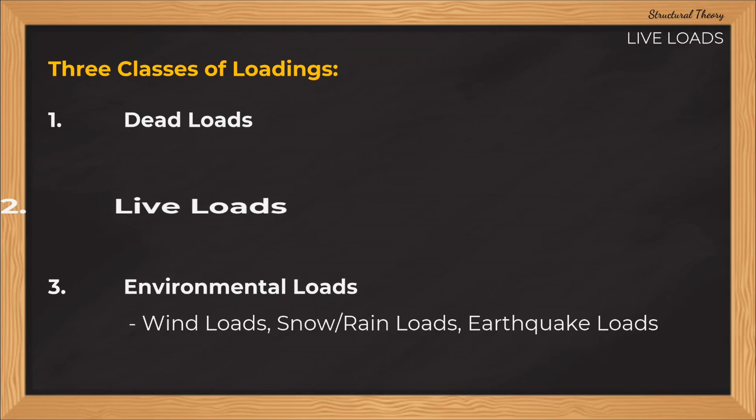So let us first define what live loads are. Live loads are loads of varying magnitudes and/or positions caused by the use of the structure. So these are loads with varying magnitudes. This means, unlike dead load where the magnitude or amount of load is constant, here in live load, the magnitude varies. This means the magnitude is not constant. And the position or point of application of our load is also varying, meaning it is not fixed at a specific point. So that is what we call live loads.

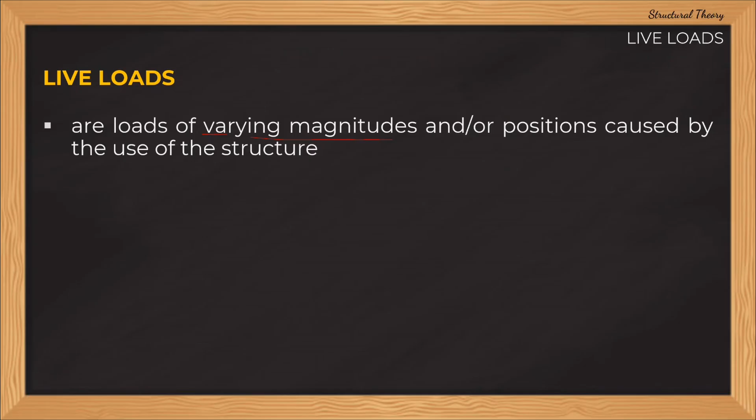They may be caused by the weight of objects temporarily placed on the structure, moving vehicles, or natural forces. So for example, in a building, our live loads here are the occupants of the building - meaning the people, the weight of the people. Their magnitude varies, meaning the weight of occupants differs from person to person, and the point of application of our live loads also varies.

Then another example we can consider as live load is the equipment we place in our building, or tables, chairs, beds, cabinets, and similar items. These are temporarily placed on the structure and can be relocated, which is why they are called live loads.

So there are two types of live loads. The first is what we call live loads for buildings, and the second is live loads for bridges. What we will discuss in structural theory is only the live loads for buildings. But if I have time, I may also discuss live loads for bridges. Of course, live loads for bridges are different because the live loads there are the vehicles passing on the bridge.

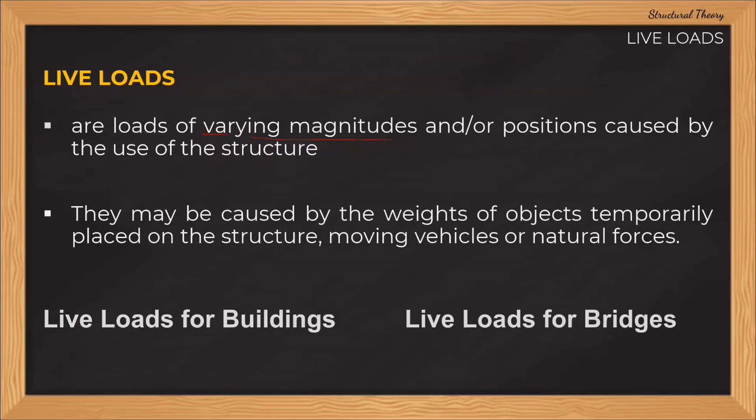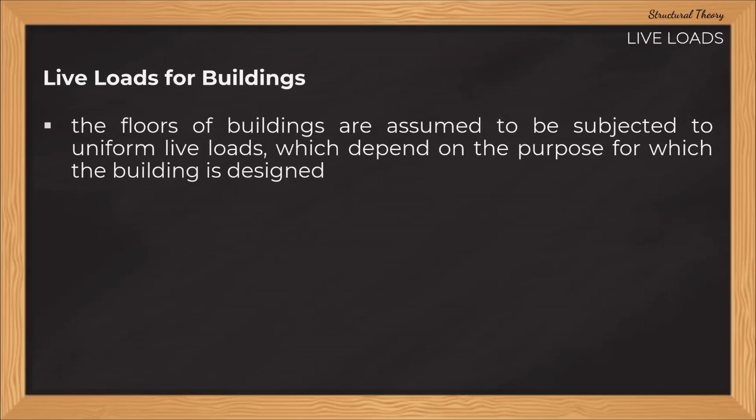So let's focus on live loads for buildings. The floors of buildings are assumed to be subjected to uniform live loads which depend on the purpose for which the building is designed. Our live loads in a building depend on the purpose of how we design the building. For example, when we design a classroom building, its live load is different from another building, say a library, or another building like an office building. The live load differs depending on the use of the building.

So our basis here is section 205 of NSCP 2015. According to section 205.1, live loads shall be the maximum loads expected by the intended use or occupancy, but in no case shall be less than the loads required by this section. So again guys, what's in NSCP 2015 are the minimum live loads used for design. If our actual live load is greater than those reflected in NSCP, we use the actual value. But if our actual value is lower, we use what's in NSCP, because these are the minimum required live loads.

Okay, so here guys, section 205.3, which is called floor live loads. According to this, floors shall be designed for the unit live loads as set forth in Table 205-1. This load shall be taken as the minimum live loads of horizontal projection to be used in the design of buildings for the occupancies listed, and loads at least equal shall be assumed for uses not listed in this section but that create or accommodate similar loadings.

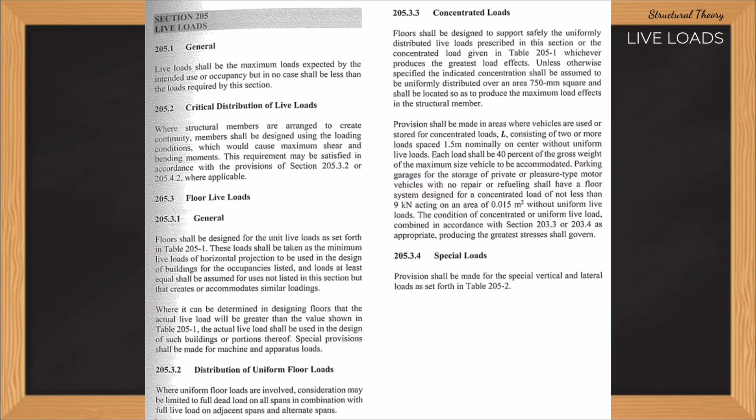So let's find Table 205-1. Here it is in this table. The title is Minimum Uniform and Concentrated Live Load. So again, our live loads depend on the category, description, or the occupancy itself of our floor.

Take note guys, as a reminder to everyone, live loads are applied to the floor or slab. Specifically to the slabs. Starting from the second floor, third floor, fourth floor, and so on.

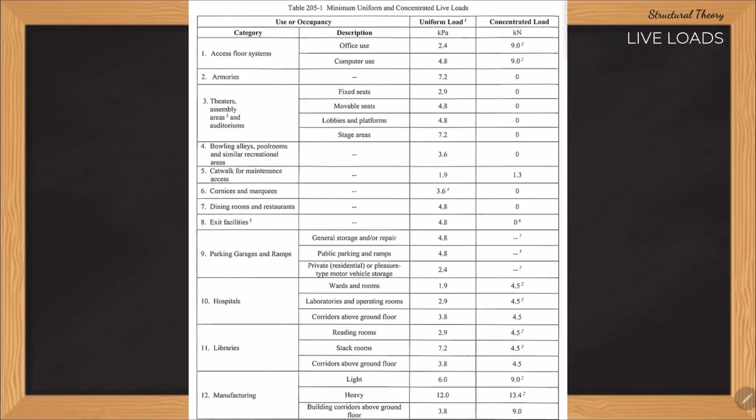So again guys, it depends on the use or occupancy. For example, we have here dining room and restaurant. The live load we'll use is the uniform load of 4.8 kilopascal. Usually what we use is the uniform load, not the concentrated load. But there's something written in the NSCP regarding the use of concentrated load, so you can read that. In this video, we'll focus on the uniform load.

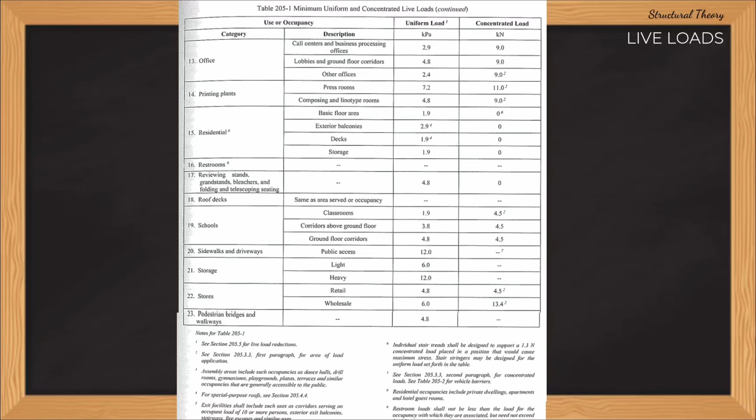So again, if the building is residential, the basic floor area is 1.9 kilopascal. Exterior balcony is 2.9 kilopascal. Decks or roof decks is 1.9 kilopascal, and storage is 1.9 kilopascal, and so on. There are many items listed up to item number 23, which we can choose from later when we solve a problem.

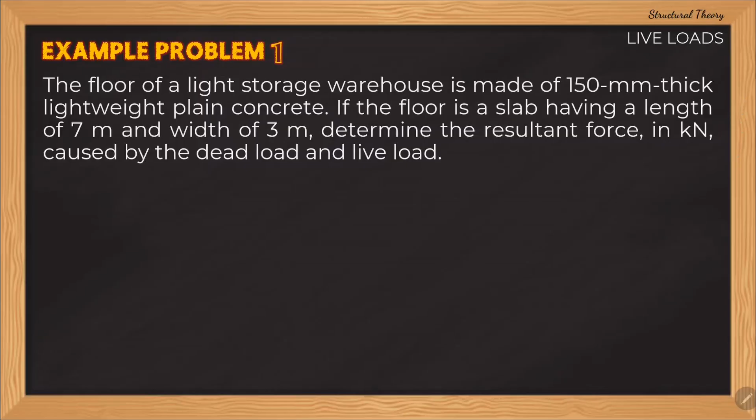So again, we have a slab with a length of 7 meters and a width of 3 meters, and a thickness of 150 mm thick lightweight plain concrete. Now, what we want to get here is the resultant force in kilonewton caused by the dead load and the live load.

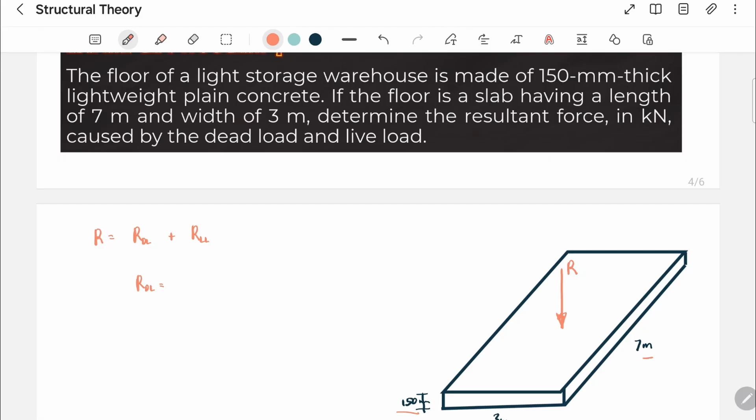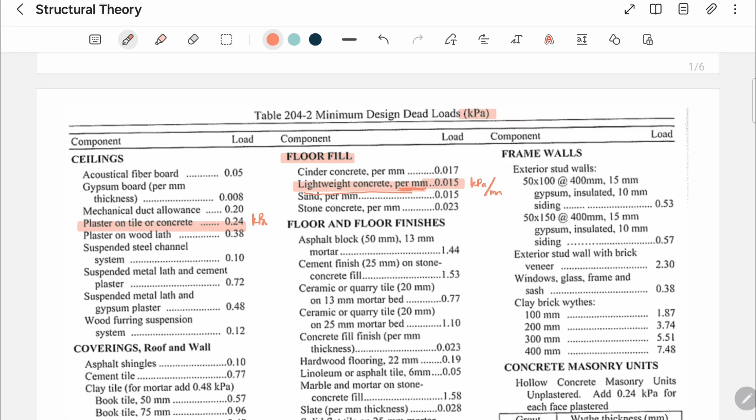So again, this is a 150 mm thick lightweight plain concrete. If we look here, we have a floor fill of lightweight plain concrete, and that is 0.015 kilopascal per millimeter. So that's what we'll use for our dead load, this is 0.015 kilopascal. When we say kilopascal, that is kilonewton per square meter.

Then per millimeter - there's still that per millimeter, guys. So to make our unit just kilonewtons, take note that our target unit is kilonewton, we multiply by the thickness, which is 150 mm, then multiply by our 7 meter dimension, and then the 3 meter dimension.

So, the resultant dead load is equal to 47.25 kilonewtons. Okay, so that's for the dead load.

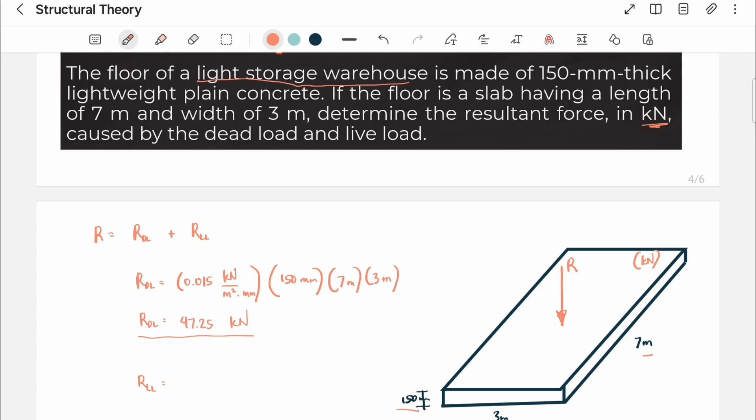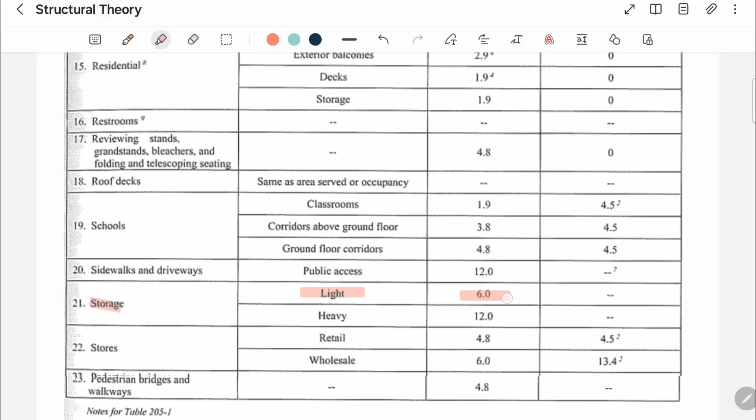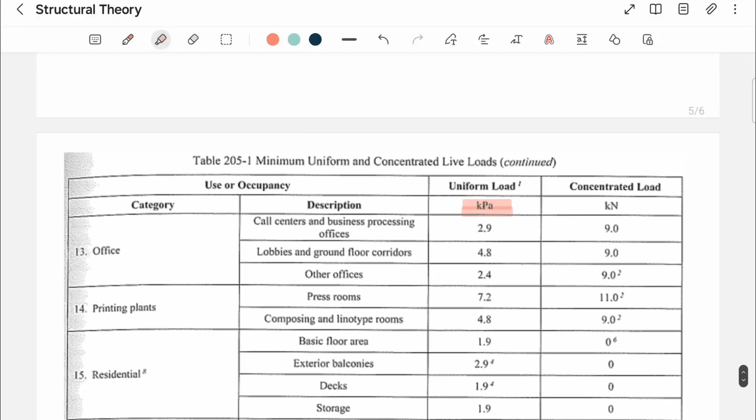So if we go to Table 205-1, we find the section for storage. We have here 'light' and that is 6.0, which is what we'll use. Take note, our unit here is in kilopascal or kilonewton per square meter. So 6.0 kilopascal - our live load is 6.0, in kilopascal or kilonewton per square meter. Our target unit again is kilonewton.

So i-multiply natin ito ng 7 meter by 3 meters. Okay? 7 meters by 3 meters. So yung ating resultant na live load is equal to 126 kilonewtons. Okay, so ito na nga guys yung ating resultant na live load.

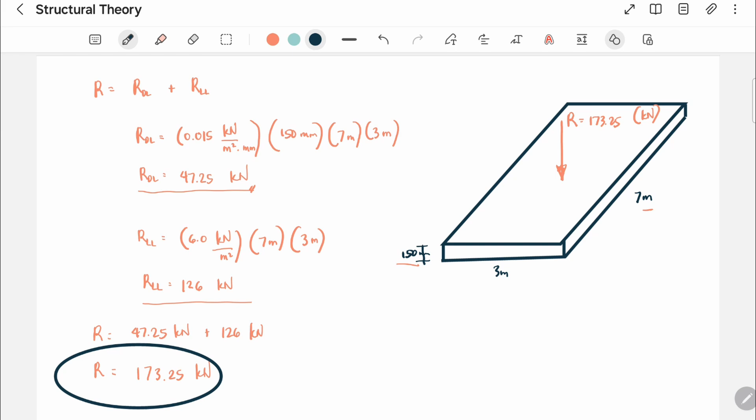So yung ating R which is caused by the live load at saka dead load, i-add lamang natin yung 47.25 kilonewtons plus 126 kilonewtons which will be equal to 173.25 kilonewtons. Okay, so yung ating final answer dito again is 173.25 kilonewtons.

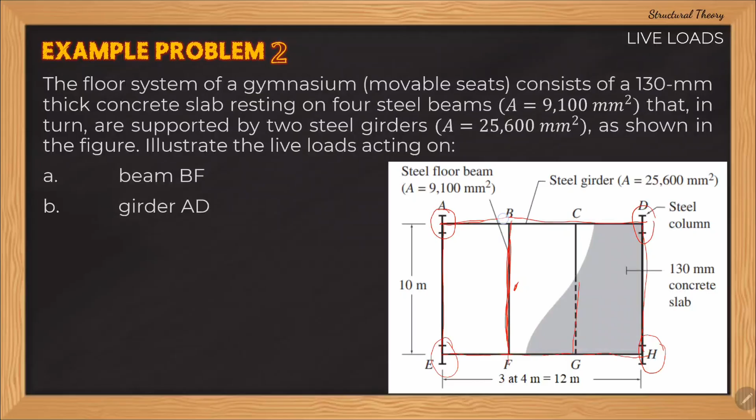So ngayon, yung tinatanong is kailangan daw natin i-illustrate yung live loads na nag-a-act sa beam BF na to, okay? And sa girder AD, ito yun, ABCD, okay? Sige, so let us now solve this problem.

So again guys, sagutin natin tong problem na to. So yung ating 4 na beams ay AE, BF, CG at saka DH. So sa 4 na beams na yan, doon nakapatong yung ating floor or slab. Tapos yung ating 4 na beams ay nakapatong naman sa ilalim nun ay merong 2 girder na ABCD and EFGH. Okay? So ngayon yung tinatanong dito is we have to illustrate yung live loads na nag-a-act sa beam BF at saka sa girder AD. Okay?

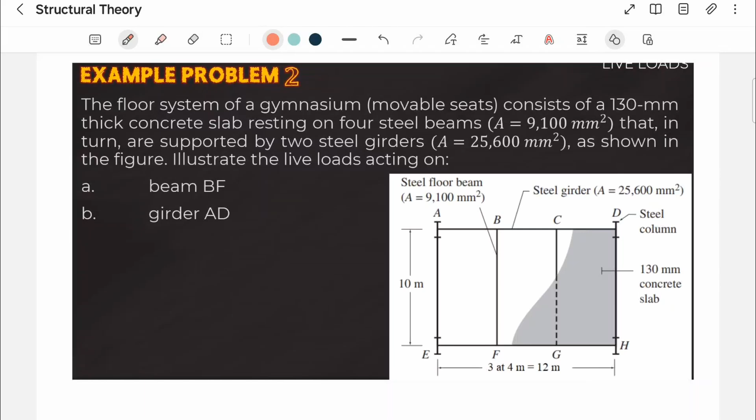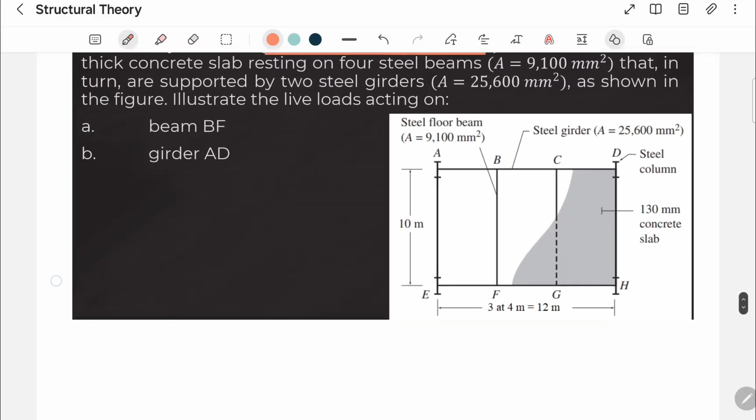Sige, so ang gawin muna natin is hanapin muna natin yung live loads na ating gagamitin galing sa NSCP 2015. So ito nga daw ay gymnasium which has movable seats. Okay? So according to table 205-1, meron ditong theaters, assembly areas, and auditoriums, okay, na merong movable seats. Pero hindi sinabi yung gymnasium. Pero take note na meron ditong superscript na 3.

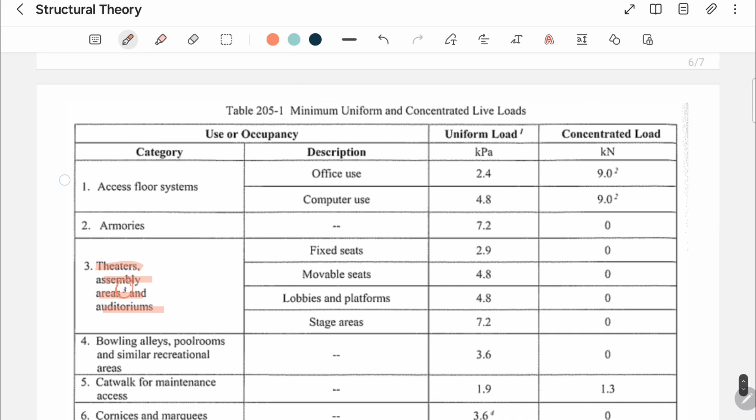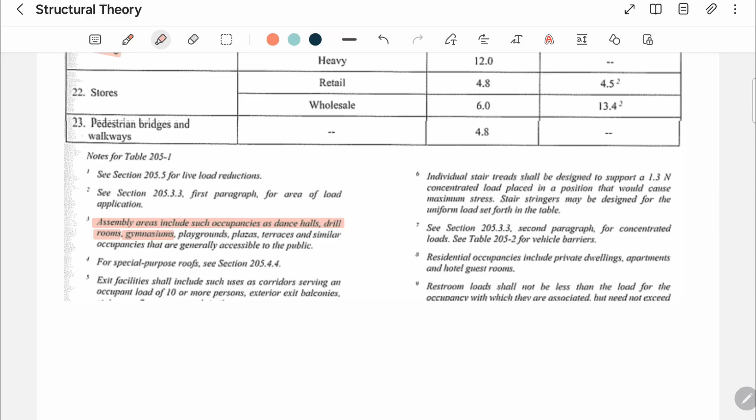Basahin muna natin kung anong sinasabi dyan sa superscript na yan. Ayun, so ang sabi dito sa superscript, assembly areas include such occupancies as dance halls, drill rooms, gymnasiums. Ayun, so na-mention na sa gymnasiums guys. So ibig sabihin, kasali dyan sa row na yan, yung gymnasium. So again, yung gagamitin natin is eto, and that is movable seats, and it means 4.8 kilonewtons per square meter. That means kilopascal yung ating unit.

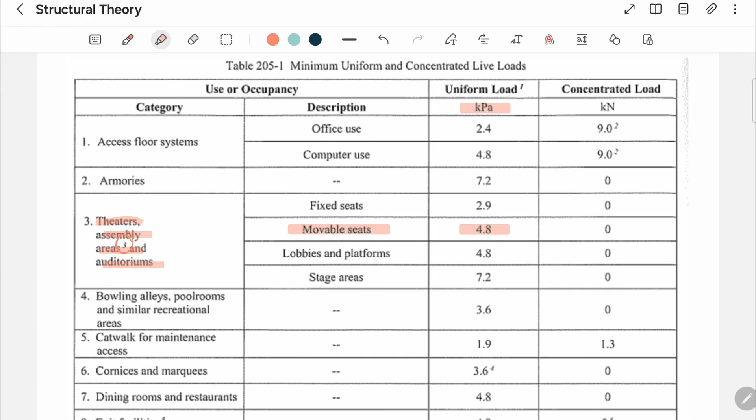Okay, so para maintindihan natin guys yung situation dito sa ating problem, nag-drawing ako dito. So again, ito yung ating point A, ito yung ating point E. So ito yung ating beam AE. Then ito yung B, ito yung ating F, then ito yung ating C, then ito yung ating G, then ito yung ating D, and then ito yung ating H. Okay? So bali guys, itong apat na to na mga beams, take note, ito yung bumubuhat sa ating slab.

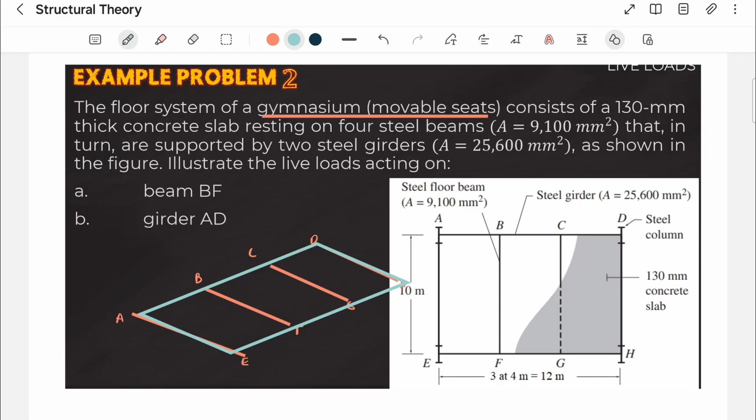So meron tayong slab sa ibabaw netong apat na beams. So meron tayong slab dito. So sa ibabaw yung slab na yan ha. Tapos bali guys, yung bumubuhat sa slab na yan is yung apat na beams na nandun sa ilalim. Tapos sa ilalim naman itong apat na beams ay may bumubuhat na dalawang girders. So meron tayong girder dito sa ilalim. Okay? Girder. Tapos meron din tayong girder dito sa ilalim ni ABCD.

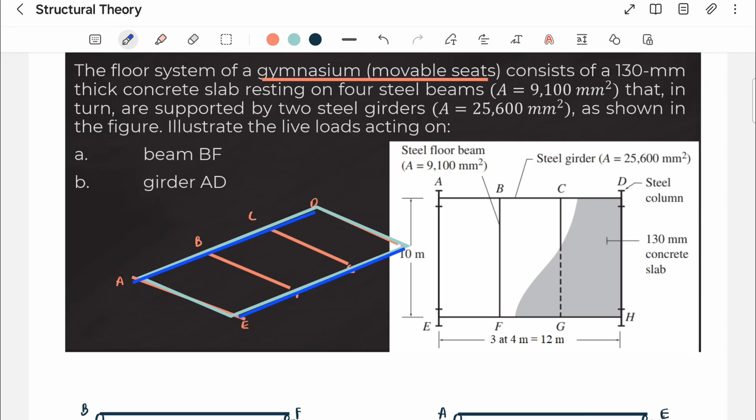So again guys, yung girder ABCD at saka girder EFGH ay nasa ilalim nung apat na beams na nakikita natin na orange. Okay, so ibig sabihin guys, galing sa ibabaw, yung makikita natin is yung green na slab. Yung bumubuhat sa green na yan na slab is yung apat na beams na naka-orange, and then yung bumubuhat naman sa apat na beams is yung blue na dalawang girders. Okay, tapos yung bumubuhat dyan sa girders na yan is yung mga poste na nasa A, nasa D, nasa E, at nasa H.

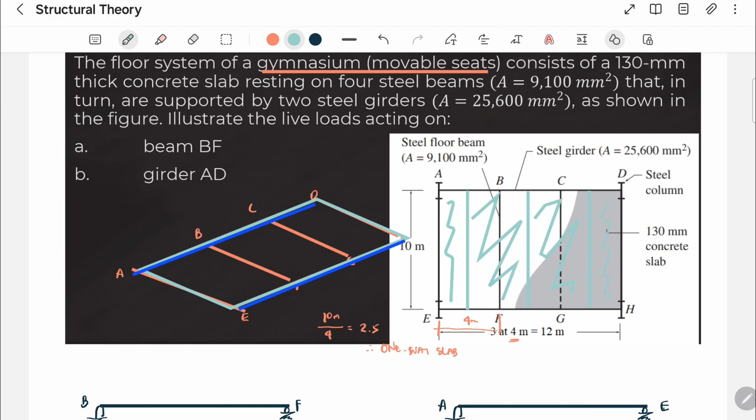Let's solve the live load carried by BF. This is our live load, so this is W.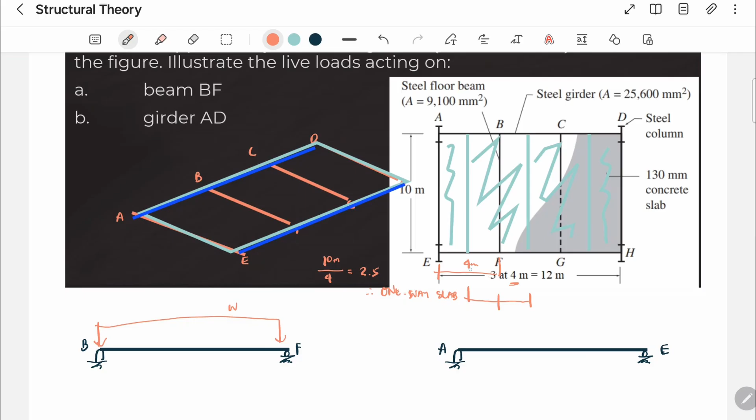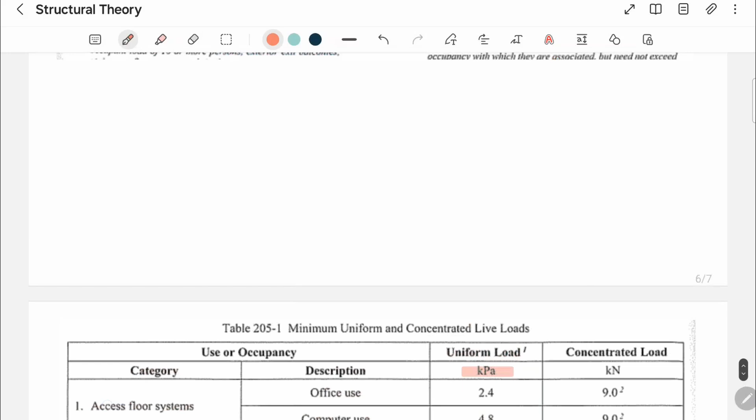That's 4.8 in kilonewtons per square meter, it's in kilopascal. We just multiply it by this width, this width is what we multiply to get our live load. This is 4 meters.

So this equals 19.2 kilonewtons per meter. Take note, this beam BF has a length of 10 meters and our live load here is 19.2 kilonewtons per meter. Take note, what we use here is the tributary width, 4 meters, that's what we multiply.

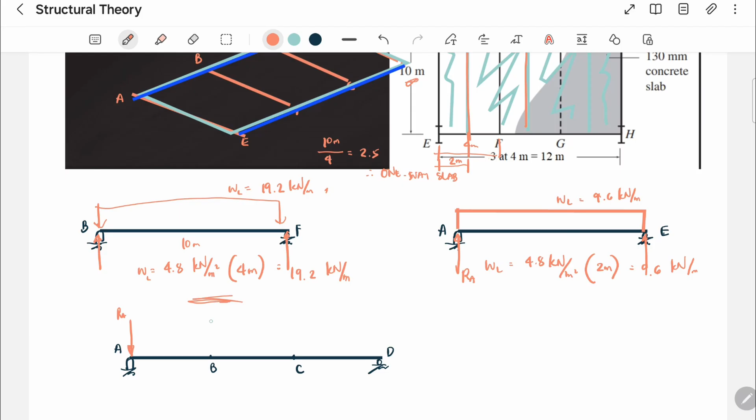Ibig sabihin guys, ilalagay natin dito yung ating load. Itong load na to, ito yung reaction galing kay A. Kung ano yung reaction dito, yun yung ilalagay natin dito. Then sa B naman, kung ano yung reaction dito sa B, yun yung ilalagay natin dito. At sa C, kung ano yung reaction doon sa may CG, yun yung ilalagay natin dito. At sa D, kung ano yung reaction doon sa may DH, yun yung ilalagay natin dito.

Kung napapansin natin, si BF at saka si CG, pareho sila ng situation kasi pareho silang nasa gitna ng ating slab. So ibig sabihin, kung ano yung reaction sa may B, yun na din yung ating magiging reaction sa may C. I hope naintindihan yung ibig kong sabihin guys.

So sige nga guys, ang gawin natin is i-compute natin yung reaction sa B at saka reaction sa F. So madali lang, this is symmetrical.

Ibig sabihin, nahatiin nung dalawang reactions na to yung load natin na 19.2. So by summation of forces Y equal to 0, upward positive, pareho yung ating value ng R sub B at saka R sub F. So sabihin na lang natin R yung dalawang yan.

So 2 times R, upward kasi yun, dalawa, is equals to 19.2 kilonewtons per meter multiplied by 10 meters. Okay, so makuha natin dito si R at this is equal to 96 kilonewtons. So ibig sabihin, ito ay 96 at ito is also 96. So ibig sabihin, R sub B natin na ipapasa dito sa baba is 96 kilonewtons.

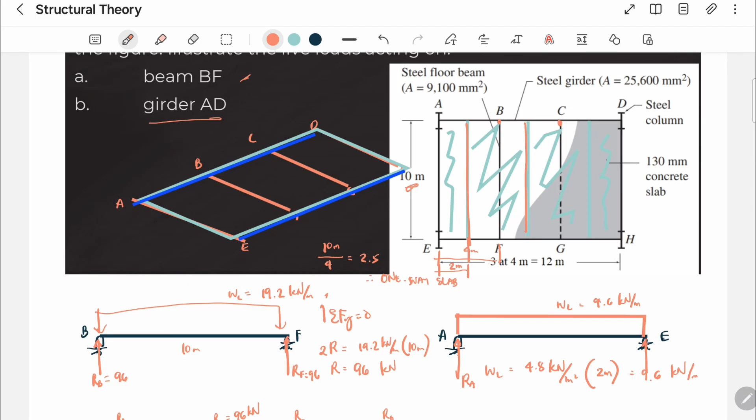So take note guys, ulitin lamang natin, yung situation ni BF at saka ni CG ay pareho. Bakit? Kasi pareho silang nasa gitna ng mga beams. Ibig sabihin, kung ano yung reaction sa B, yun din yung magiging reaction natin sa C. So kung 96 kilonewtons si R sub B, 96 kilonewtons din si R sub C, kasi magkaparehong beam man yung BF at saka CG. Pareho sila ng pinapasan na load.

Okay, so ayun, dito naman tayo guys sa isa pang beam and that is the beam AE. At yung beam DH natin, take note, kapareho ng situation kay beam AE. So dito tayo guys sa beam AE. Ngayon, ang kukunin lamang natin dito is the reaction at A or the reaction at E. Pareho lang itong values na to guys because this is symmetrical nga yung ating beam.

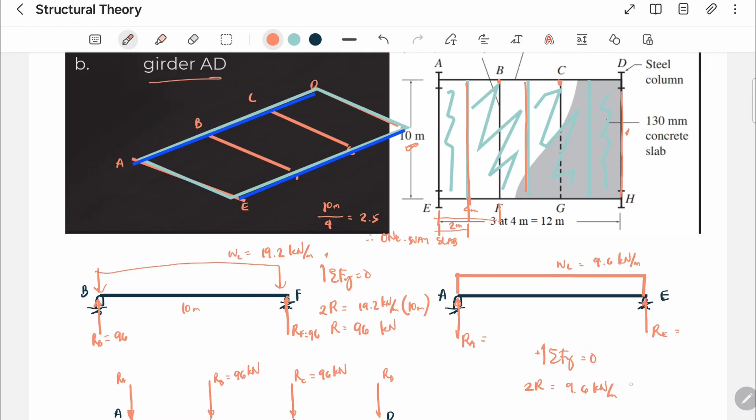Okay, so para sa pagkuha ng ating reaction, summation of forces Y equal to 0, upward positive. So 2R na naman, gagawin natin lang nating R, kasi pareho lang naman yung value ni R sub A at saka R sub E. So 2R is equals to 9.6 kilonewtons per meter multiplied by 10 meters. Take note, 10 meters yung ating length netong ating beam.

Okay, so ibig sabihin, R natin is equal to 48 kilonewtons. So R sub A natin is 48 kilonewtons, R sub E natin is also 48 kilonewtons. So ibig sabihin guys, ito is 48 kilonewtons.

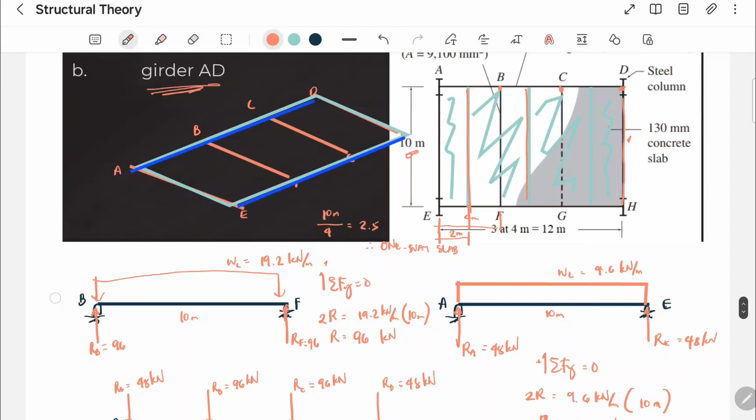At ang sabi nga natin kanina, yung ating DH ay kapareho ng situation ni AE. So ibig sabihin kung ano yung reaction sa A, ganun din yung reaction sa D, which is 48 kilonewtons din ito. So ito na nga yung ating illustration ng mga live loads na mag-a-act kay girder AD. So ito yung ating final answer para sa letter B. Ito yung ating sagot sa letter A at ito yung sagot natin sa letter B. I hope naintindihan nyo yung ibig sabihin, yung pag-solve nitong problem, guys.